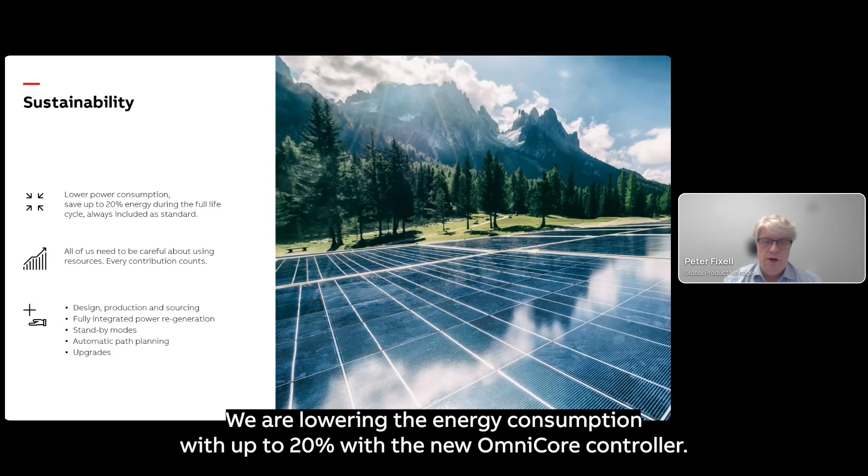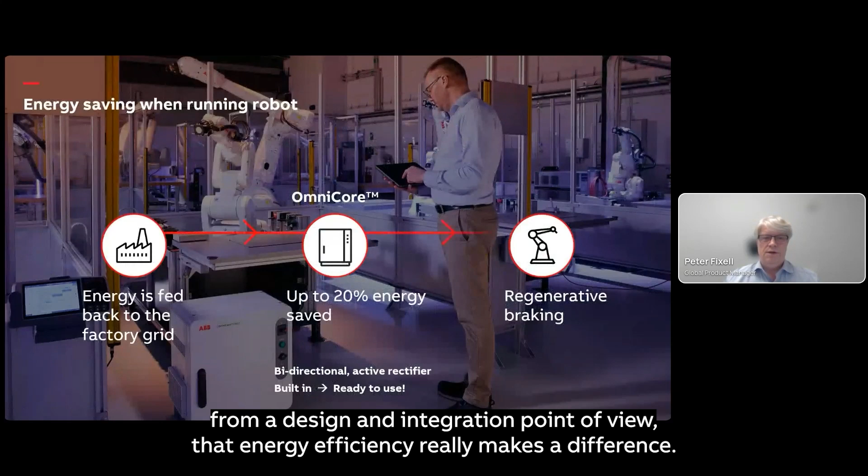So that is really what we want to target with this presentation. We are lowering the energy consumption by up to 20% with the new OmniCore controller, using the latest technology available on the market, really creating designs that will fulfill those targets we have. On the next slide, I will show you 3 different areas where we believe, from a design and integration point of view, that energy efficiency really makes a difference.

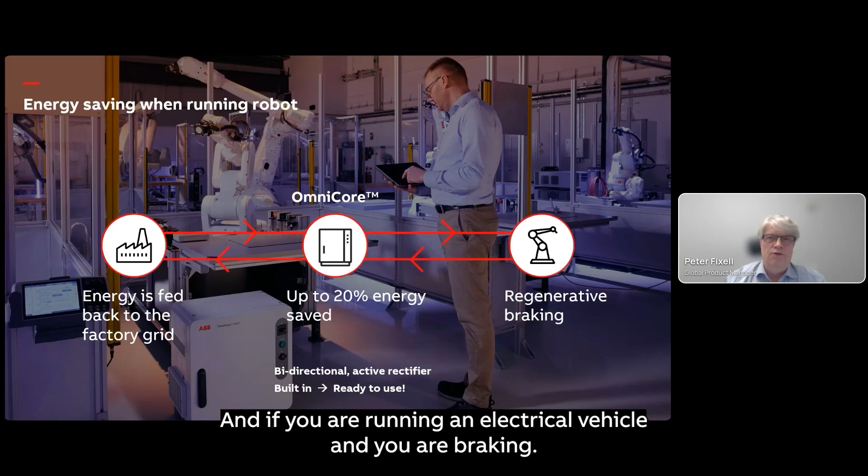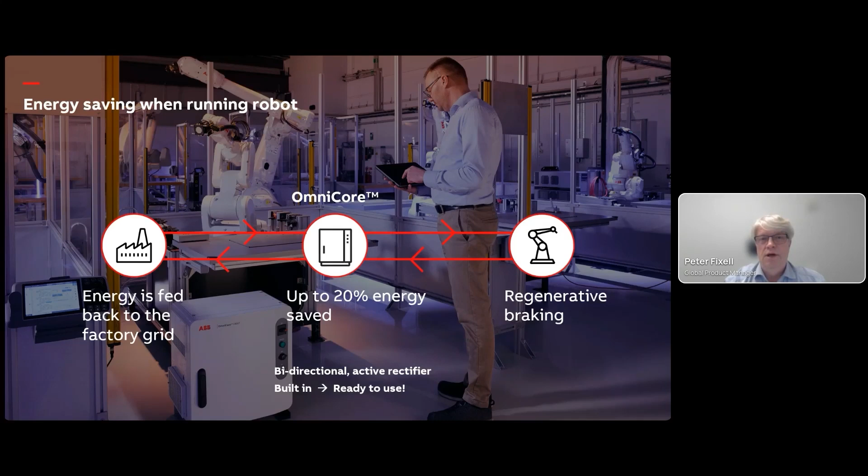Among these 3, the first one is about the design of the controller itself. I think you're all familiar with electrical vehicles. If you're running an electrical vehicle and you're braking, what happens with the energy that previously was just using mechanical brakes, which ultimately became heat and waste? Now you're using the motor in the vehicle to act as a generator and charge your battery, so you can use that energy when you are accelerating again.

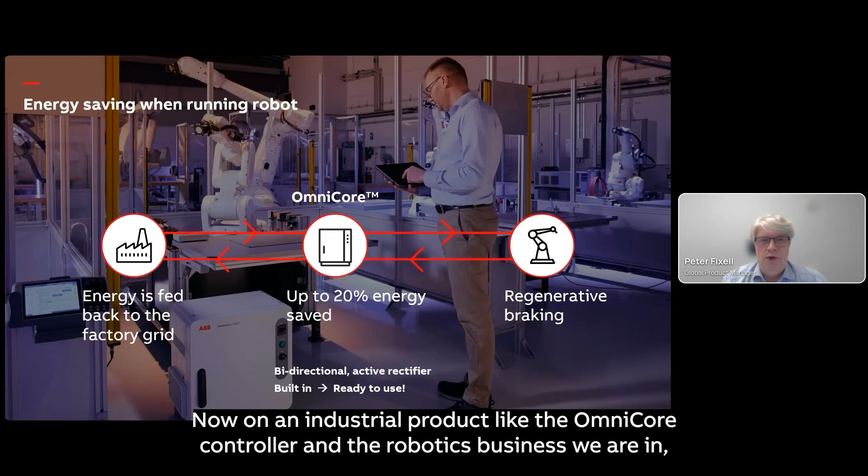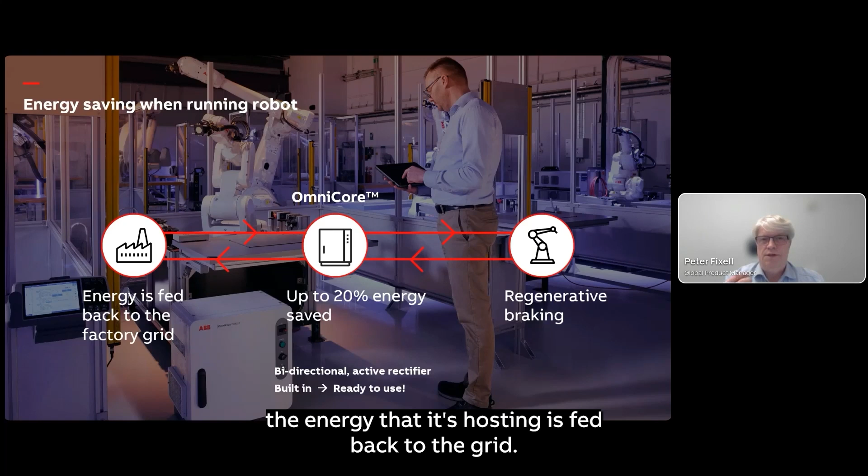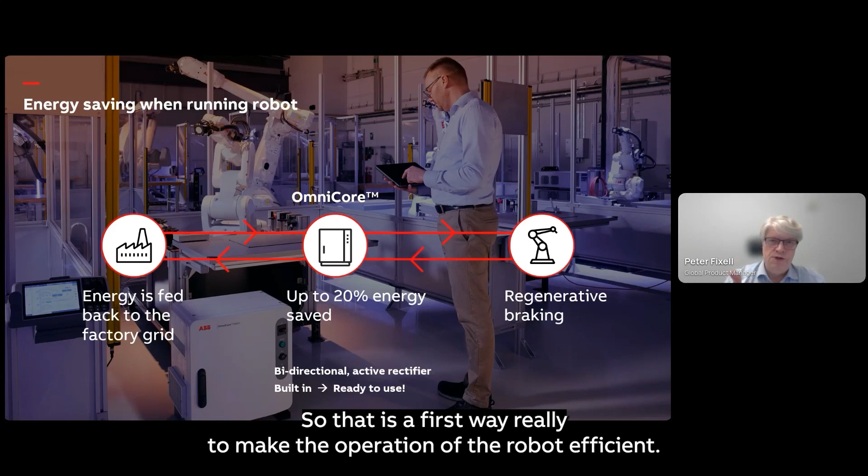Now on an industrial product like the OmniCore controller and the robotics business we are in, we don't have batteries. So the way we have done it is when the robot is braking or reducing speed, the energy it's hosting is fed back to the grid. That is done using a technology we call a bidirectional active rectifier. So if we are using energy from the grid, we pump it into the robot and make the robot move. When the robot is coming to a stop, we feed that energy back to the grid. In this way, we save up to 20% energy. So that's the first way to make the operation of the robot efficient.

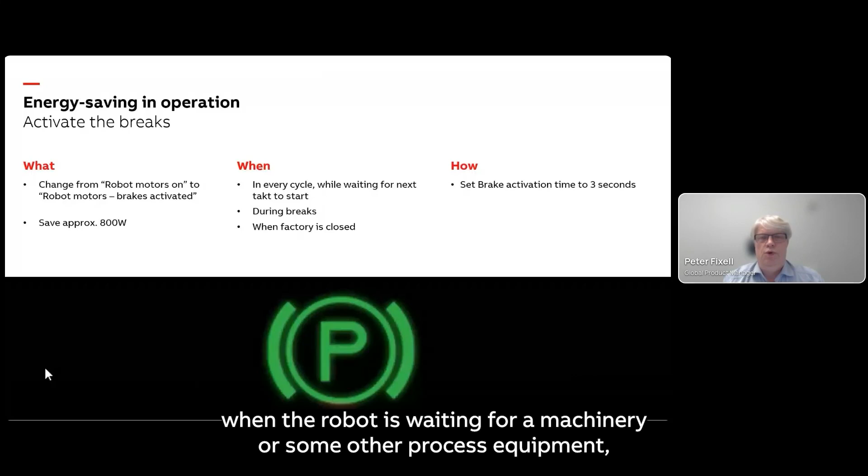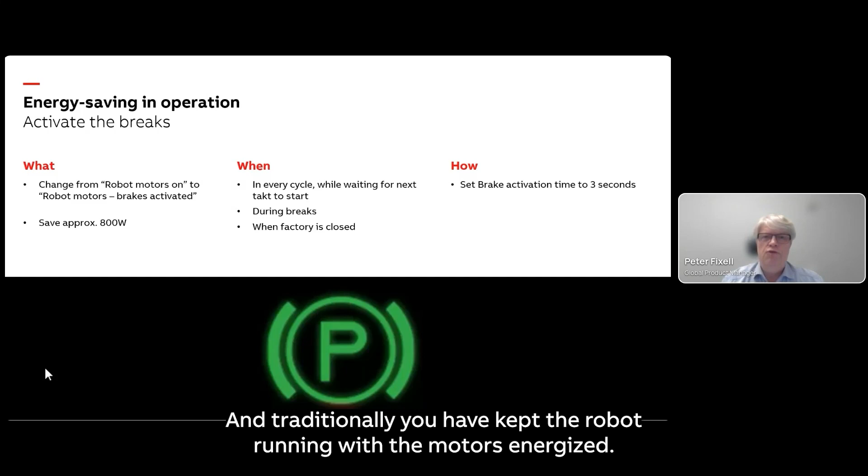On the next slide, there's a situation when you're using the robot and it's in operation, but as you all know, there are pauses in your production process. When the robot is waiting for a machinery or other process equipment, or if you have a tacted production line, you're waiting for the next tact. So there is waiting time built into any process we look at. Traditionally, you've kept the robot running with the motors energized. When the motors are energized, you're fighting gravity. So the robot is standing still, but it's fighting gravity and consuming a lot of energy. For a large size robot, this is about 800 watts.

So what you can do is activate the brakes directly. You can do it within 3 seconds, 10 seconds, your choice. If you activate it early, you are saving 800 watts during operational waiting times. So that is the second part we have.

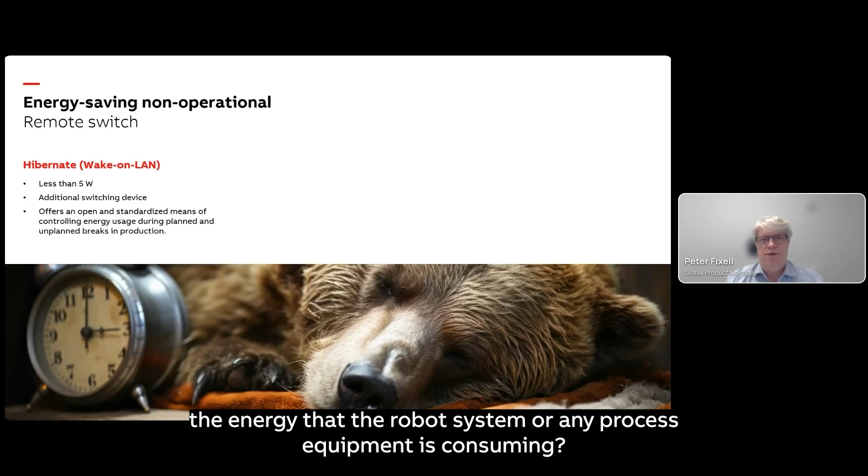Now the third part, when it comes to design of a robot system, illustrated with this nice bear that is sleeping, is what we call hibernate or Wake-on-LAN. Imagine you're going for lunch, or leaving the factory for the evening. It would be traditional to leave all the systems powered up. But what if you want to save the energy that the robot system or any process equipment is consuming? Then we have what we call a remote switch. A remote switch enables you to switch off all the robots from a PLC or other centralized equipment, saving another 200 watts approximately. So it's consuming less than 5 watts in this status.

So really 3 areas: during operation, while waiting, and when you are in downtime during nights, evenings, weekends. If you are active in these, you can save a lot of energy. So these are the things built into the system.

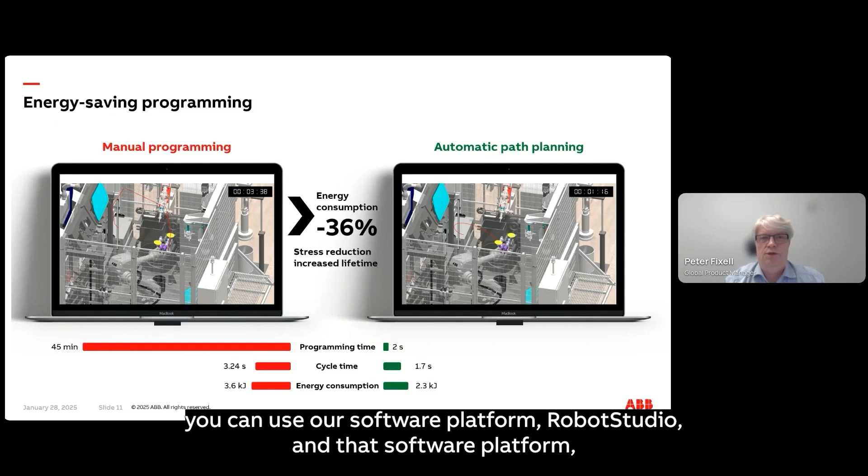When you program the robot, either you do a manual programming that is based on the experience of that specific person, or you can use our software platform, RobotStudio. That software platform provides automatic path planning, meaning you give a starting point and an end point, and the RobotStudio software will automatically generate the best path in between those positions.

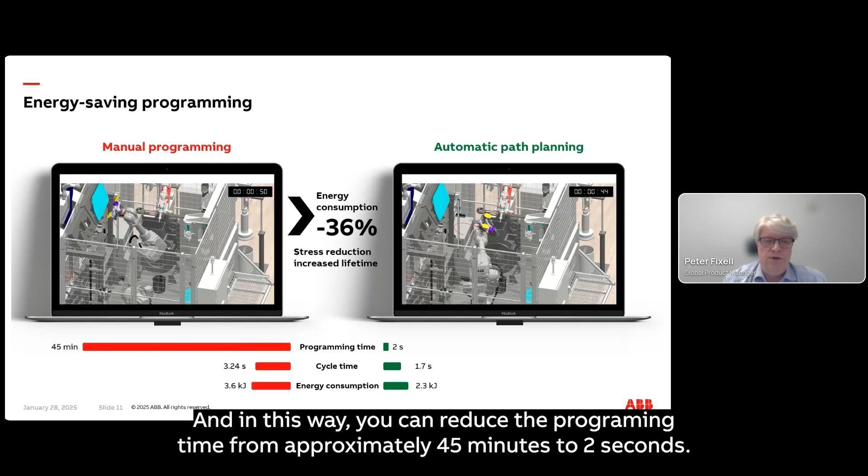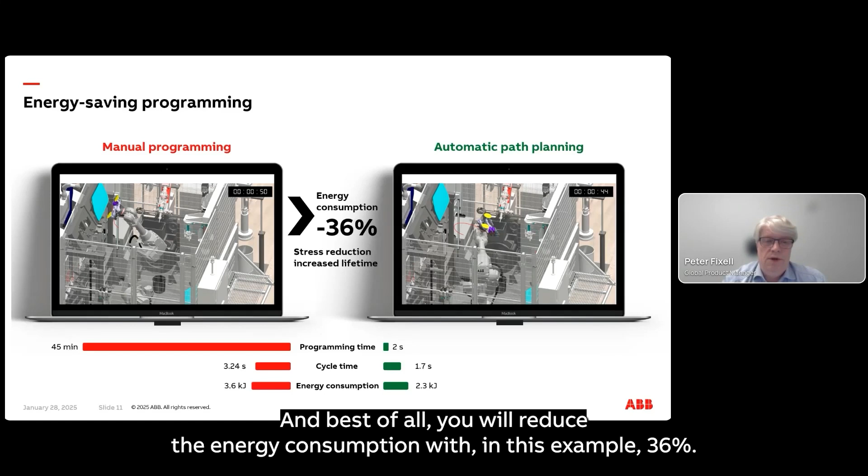And if you have simulated the environment in a CAD model, it avoids collisions and gets the perfect uncollided path. In this way, you can reduce programming time from approximately 45 minutes to 2 seconds—it's just a click away. You will reduce the cycle time, and best of all, reduce the energy consumption, in this example by 36%, but that's an average. Depending on how complex the path is, you will save more. If it's a fairly simple path, maybe you won't save 36%, but it will give you the best possible path. So that was the fourth thing: how you program your robot.

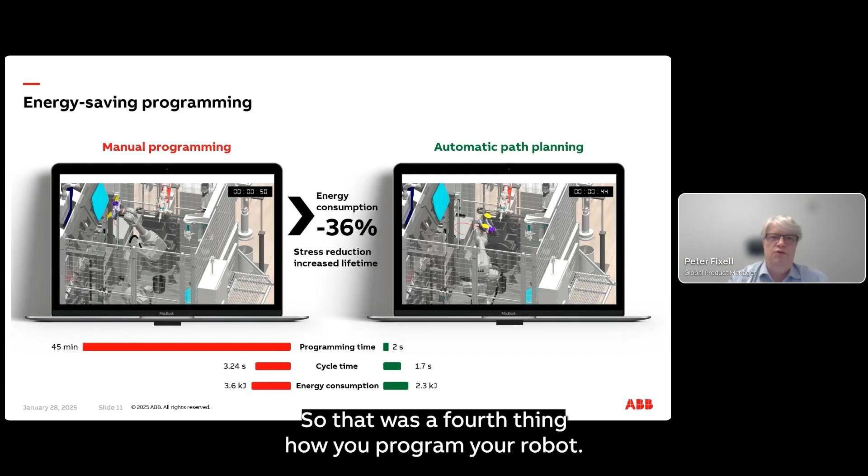So we really are focusing on giving you the best opportunity to be sustainable.